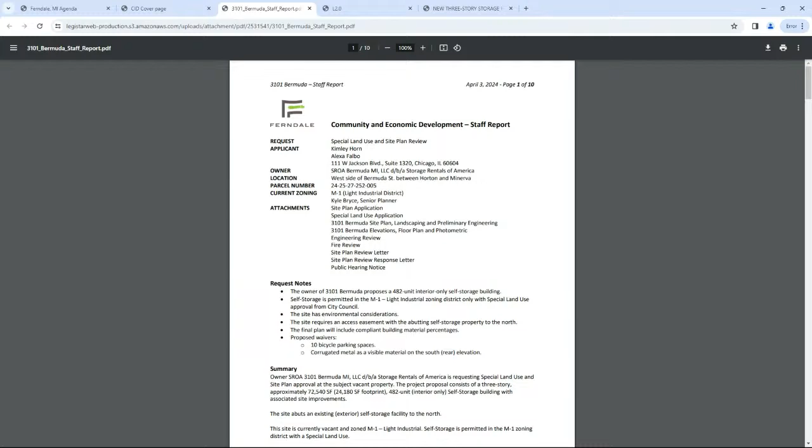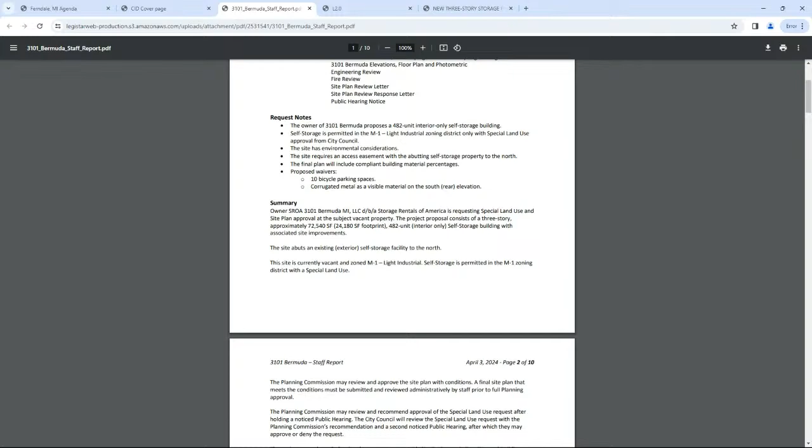There are some environmental considerations at the site. So I believe for many decades, this was a chemical facility. It was demolished, and there was some remediation done, I believe in the late 90s, maybe the early 2000s. I touched base with EGLE, so that's the Department of Environment, Great Lakes, and Energy. So they're aware of this project. I know the applicant's team has been discussing with them what they will need to do. I believe in the coming months they will engage a formal agreement, which is legally binding, and it requires the applicant to do a number of remediation items for the site.

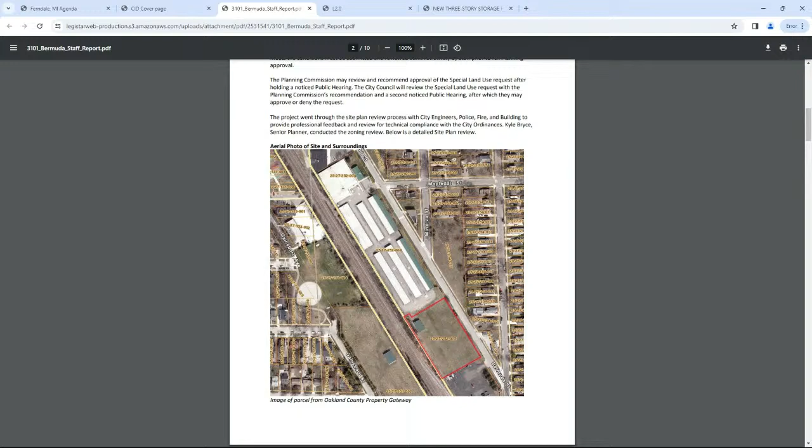It's my understanding that the site has done some remediation, so it's not like it's been untouched since the days, but the applicant will have to do a lot of investigation to ensure that nothing has gotten worse, that the existing subterranean walls are still in effect. And I believe there are other things that EGLE pays attention to now that maybe they didn't back then, but they are still required to remediate. So they've been discussing that with us, also with EGLE. They provided a Phase 1 environmental assessment report to our city engineer. So they've given us these things.

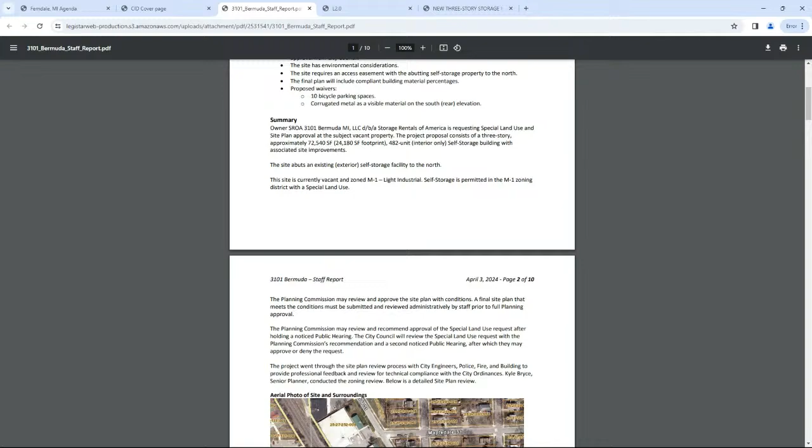So here are the preliminary site plan and engineering for the site. So it features an access point off of Bermuda. It's going to wrap around the building. So the building is up front. It's taking up 80% of the frontage in accordance with our zoning ordinance. That driveway wraps around the building. There's a loading zone that's in the rear, so it's not visible from the street. And the driveway connects to the existing storage site to the north. There's a few parking spaces up in the front.

Our zoning ordinance has a pretty low requirement for self-storage. So there's really only a handful of spaces. I mean, keep in mind, these things are really only visited by people who are dropping off their stuff, and then they don't come back for quite a long time. So they've got their ADA spaces, they've got the charging spaces, they provided the bicycle parking spaces out front.

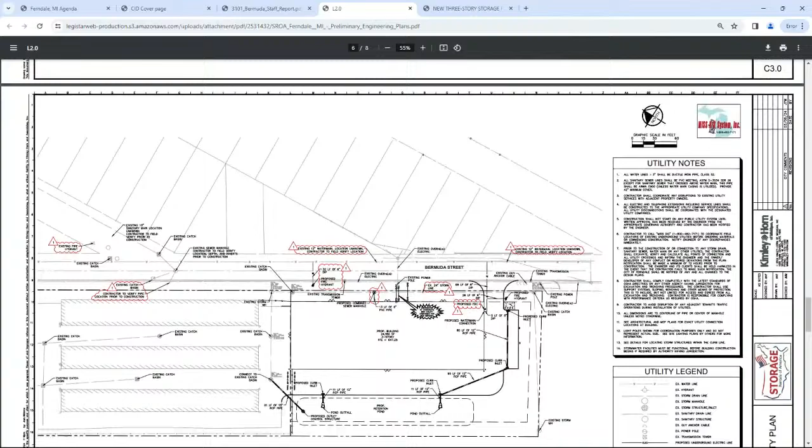In terms of stormwater detention, they are proposing a detention pond, which is a little bit unique in the city, but that's also located in the rear. Detention pond, not retention pond, right? Right, and I do get those mixed up, and I'm sure the applicant can clarify. That's often the case for me. We don't often have them in Ferndale.

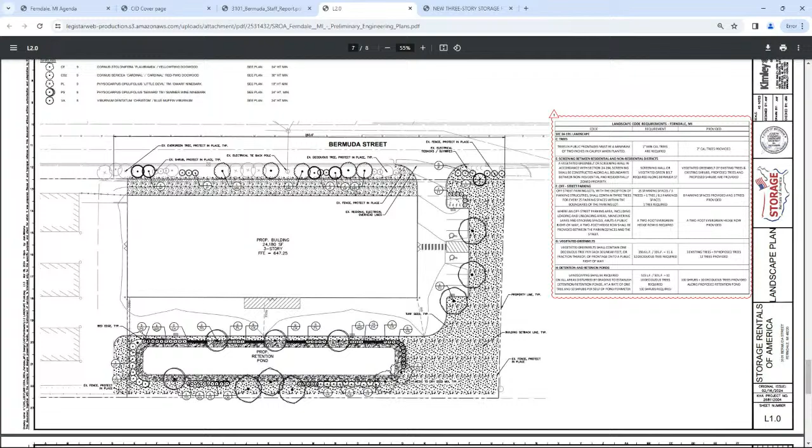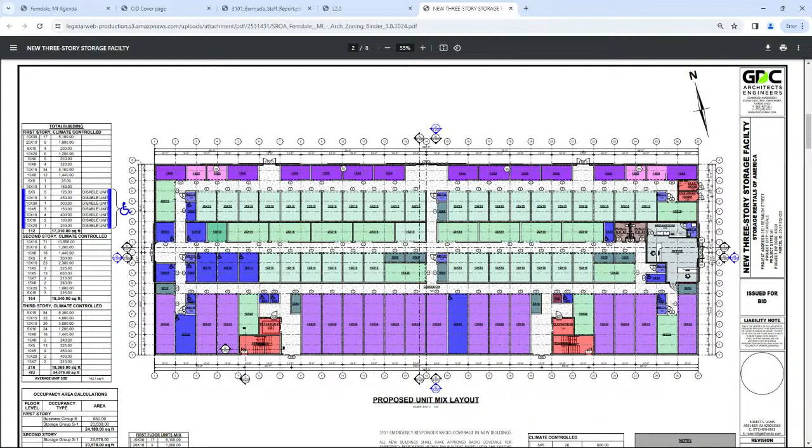A typical floor plan for a facility like this, a wide variety of storage units of different sizes, a small office and a break room, public restroom. There are a number of ADA compliant units on the first floor. And then for floors 2 and 3, it's the same kind of layout with a variety of unit sizes and counts.

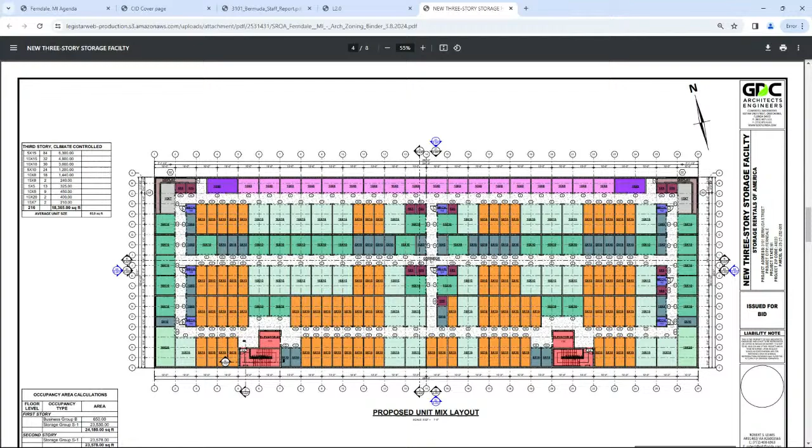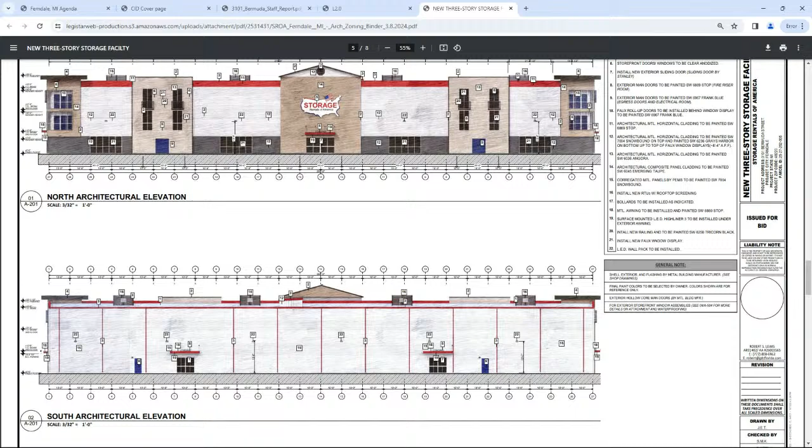Other than that, they did comply with some of our requirements, such as fenestration requirements, door access requirements. Again, some of our ordinance seems to be designed more for multi-tenant spaces, but they still were able to comply with the number of pedestrian entrances to the building.

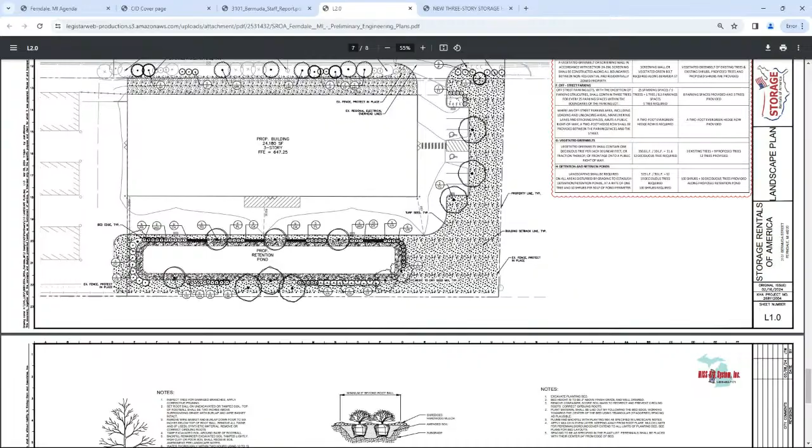So in terms of other request notes, they do back up to that north property. And so we just wanted to make sure in the event that these properties sell, or maybe they don't sell together, that there's some kind of easement that allows this access, especially with the egress door on the west side of the building. So they will comply and submit an agreement for us to review with the city attorney.

There's, of course, the environmental considerations, just to make sure they're compliant with EGLE. During a final check-in with the plan, I noticed that we don't have the percentages, so I included a condition that they'll demonstrate all the proper percentages on the plan. Visually, I'm sure they're meeting it, but we just want to see that number.

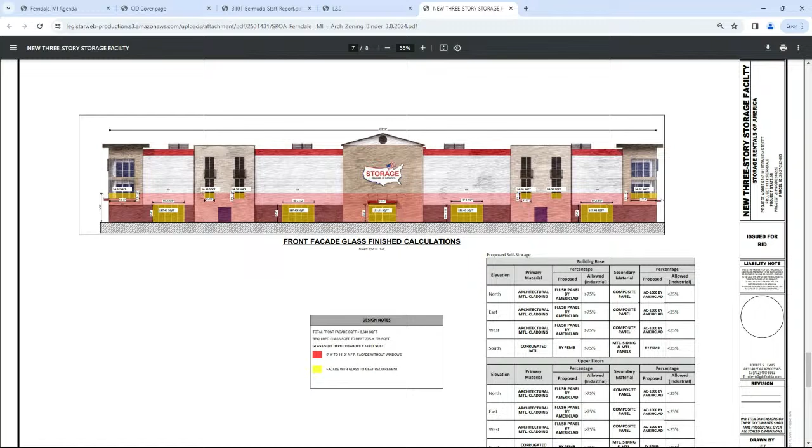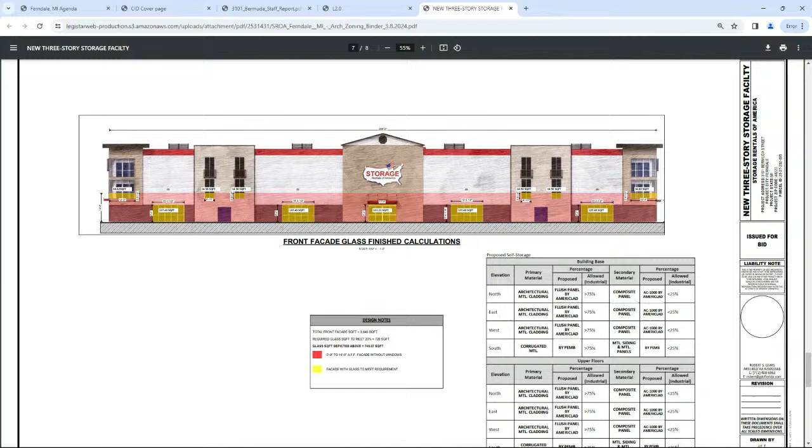And then for bicycle parking, they do require, I believe, 18 total on the site, so that'd be 11 interior, 7 exterior. They are requesting a waiver of 10 parking spaces with the rationale that people can store their bikes inside. I don't think they're anticipated to have much in the way of employees going to the site. And I believe, what else? There's something else. I think that part of the rationale is that people aren't going to be riding their bikes here with all their stuff. So they have requested a waiver of 10 bicycle parking spaces. So they do have 8 outside and out front.

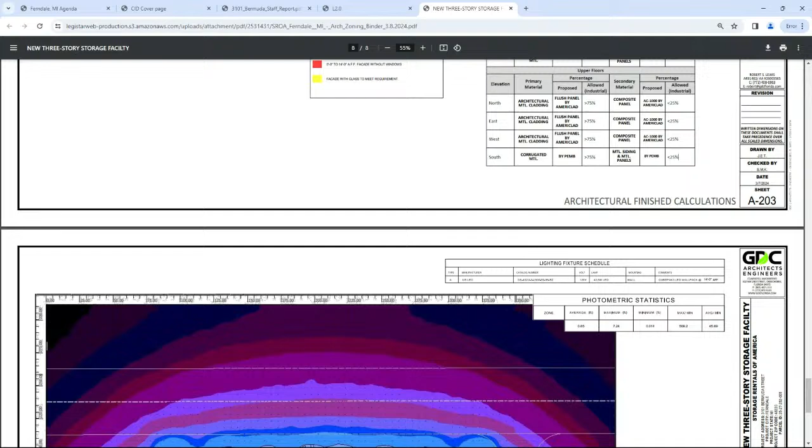I think that's all I have. So I'd like to invite the applicant up. So we do have Alexa Falbo, who drove in from Chicago this morning. You want to say a few words about the site? Thanks. And just while she's coming up, thank you, Kyle. And so we'll have the applicant provide further detail on the application, and then I will open up for a public hearing, which anyone can come up and speak during, before we move to the commission for deliberation. So welcome.

Thanks for coming, Alexa. Yeah, thank you guys for having me. Again, my name's Alexa Falbo. I'm with Kimley-Horn. We're the civil engineer for this project. And I'm here on behalf of Storage Rentals of America. The director of development, Bo Raich, unfortunately had some flight issues today, so he wanted to apologize for not being able to be here. But I'm happy to answer any questions you guys have.

I think Kyle did a great job of covering all the components of this project. I'll just add a few more things. Storage Rentals of America purchased this property a few years ago. So they obviously have the existing site and have this open property that they'd like to expand and do this 3-story building on. But we've been meeting with the city for a couple years now to come up with a good site plan, and we feel really confident with the one that we've put in front of you today.

Storage Rentals of America owns and operates properties all over the U.S., so they have a lot of experience with these types of expansions and redevelopment projects. But we feel this project will really benefit the community. Kyle touched on, we're right up against the railroad tracks, and we feel with the architectural components and landscape improvements that we're proposing, it'll create a really nice buffer along Bermuda Street.

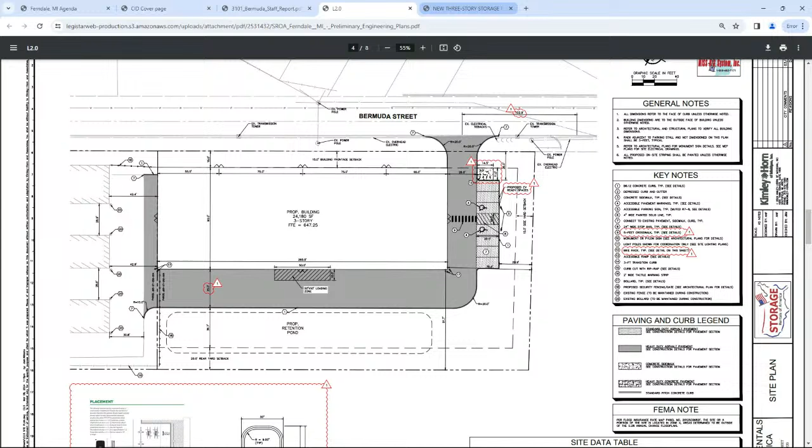Okay. So if I look at the south elevation and then go back to that drawing, where is that? That's the railroad. In the center of the building, you're calling out almost like a loading zone, but it's a wall. So I'm confused as to what the loading zone is for. That's fair. And just for clarity, we were a little bit ahead of the architects when we started design. So it looks like in this rendering there will be two loading zone areas then. Okay.

For customers to pull up with their moving trucks and unload and get access into the building. Okay, so we can update that on our site plan.

Yeah, okay, because the building is long, we didn't want the travel distance from the loading area to the farthest unit, so we split it up into 2 loading zones to make it easier for customer access to all areas of the building, and then we just forgot to update it on the civil.

I just wanted clarity on that because it looked to me like the building was going to be flipped around, and I was worried that that blank wall was going to be on the side of Bermuda.

Now, is there going to be any door access on the Bermuda side, or is all access going to be on the south and east? East, yeah. Okay, correct. Yeah, the main office will be off of the east elevation.

Okay, and then so that's where new customers can go to sign up or whatever. We're just gonna utilize the existing office at the storage facility. We're gonna build it out so it could be an office at a later date.

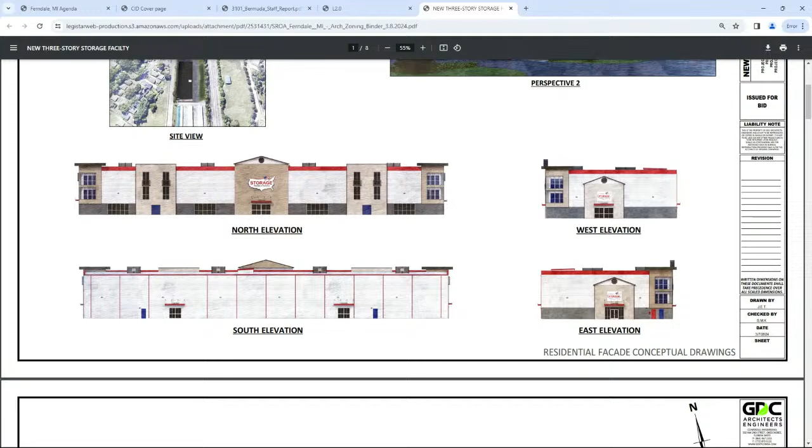And that's kind of what I'm... yeah, I understand the concern. I will just note that the site you're referring to is zoned industrial, and from a street view near the park, there is screening on that side near the tracks. Since they have the retention, with the berm and landscaping, I think that will do a fairly sufficient job of screening the building. I share the same concern.

I just wanted to note that there will be that screening, as well as there is screening on the other side and the industrial zone. We didn't propose a change to that—there's some tall growth trees along the train track.

The future land use map also designates it as industrial, and I think in our update to the zoning ordinance, we might have actually designated it as residential, so it's a good point, because I think it is an opportunity site for residential.

Was it the Edge that was built? Something like that, very similar, in a similar location across the railroad track. That's what I'm trying to avoid a future issue with.

So in terms of the phrasing of the finding, I would propose that the planning commission waive section 24-184D1D, which has the prohibition of sheet metal or corrugated metal, although if we wanted to make it more specific to corrugated metal, that might be more appropriate, because as the applicant stated, it's probably something that is actually corrugated metal, but quoted as durable, consistent with design intent of the code.

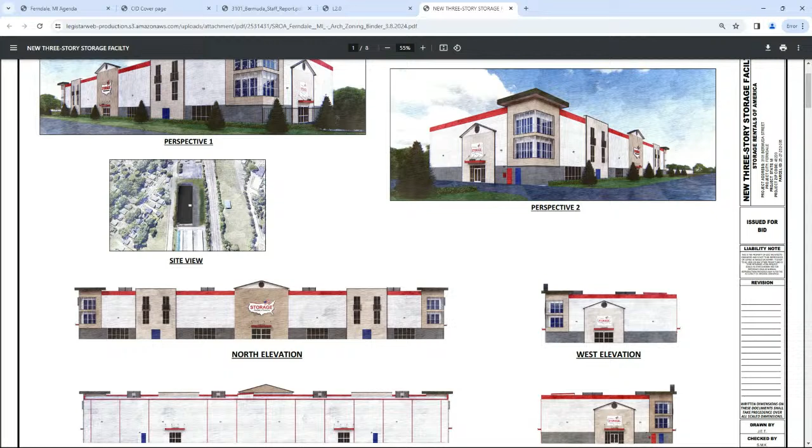Thank you everyone, to the applicant, to staff, and to the commission for working through that so we can try to get the best outcome possible. Our ordinance is gracious in that it allows us some waivers so we can work through these things, which unfortunately means we have to do a little bit more planning at the dais, but I appreciate everyone's support on that.

All right, we are moving into administrative items. Christine or Kyle, do you have anything for us this evening?